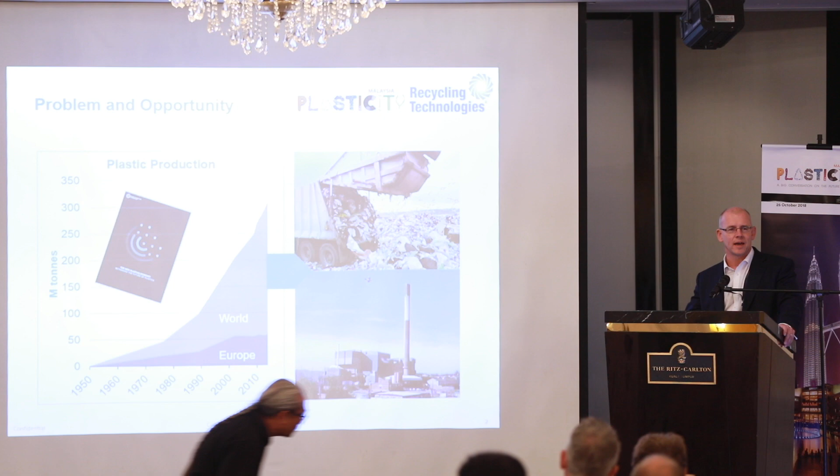So we have to sort out the right-hand side of the slide, which is what do we do with it at the end of its life. 40% going to landfill, 14% going to energy from waste, 32% ending up in the environment. These are the figures from the New Plastics Economy on plastic packaging. We all agree, completely unacceptable.

So what's the answer? If we summarize, the current recycling of plastic, which amounts to, I think it's been used several times today, 10%, is mechanical recycling. So we're washing it, we're flaking it, and we're turning it back into more products. It's going to the consumer, and then back to somebody who's molding it into another product. And that in and of itself is fantastic, and the more we can do of that, the better.

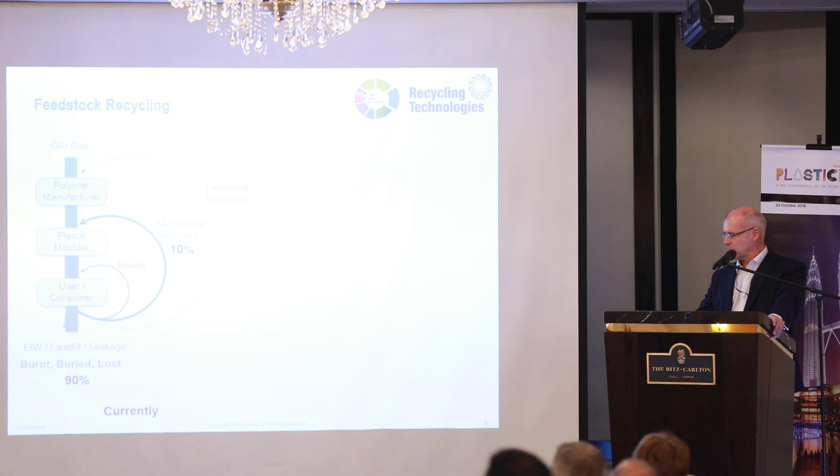But clearly, if that was going to be the solution to the problem, I suspect it'd be a lot more than 10% by this stage by now. And so we need more tools in the toolbox. We've all been hearing it's a complex problem, it's a big problem, and we need as many tools in the tool set as we can to actually fix the problem overall.

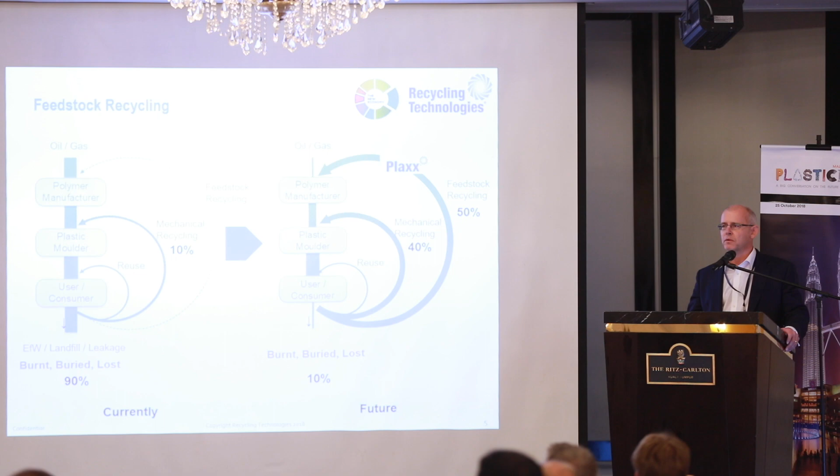One of the things I'd like us to think about is this thing called feedstock recycling. First of all, I'd say it's been great to hear about people like Ravish talking about the magnetic labels, and there's lots of new technologies coming on in mechanical recycling. So in our view of the future, at least 40% of plastic should be able to be recycled mechanically in years to come.

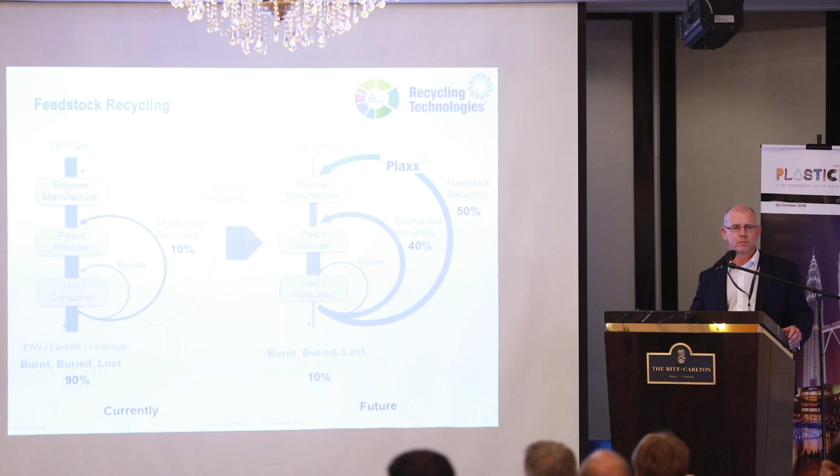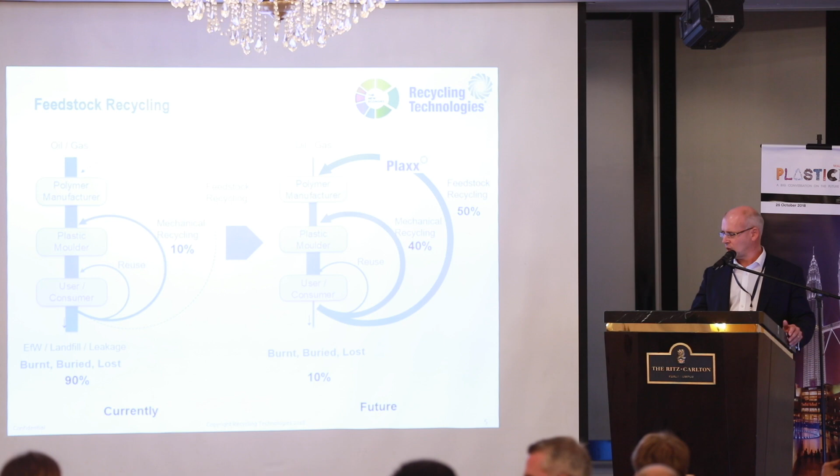Now, I've deliberately not put a time unit on the bottom, but at some point in the future. But I also see a big need for what we call chemical recycling, or more accurately, feedstock recycling—taking plastics which can't be mechanically recycled and turning them back into an oil that can be used by petrochemical companies as the starting point for making more plastics. And that's exactly what we do.

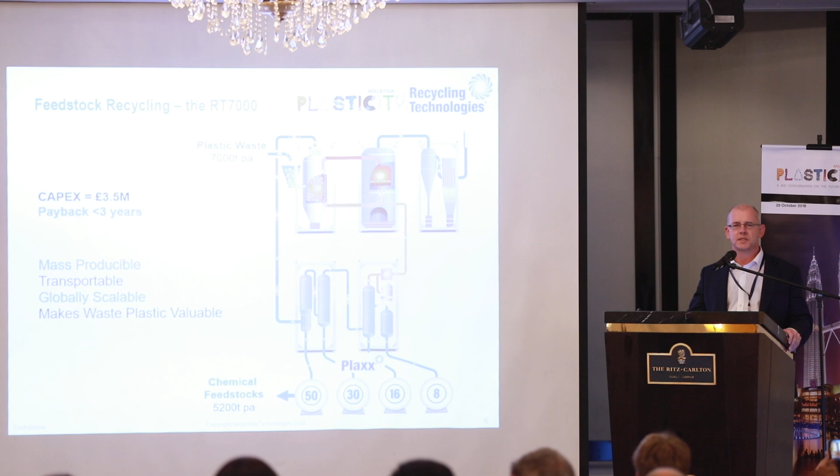Theoretically, you could build one big facility and take all of the plastic that you can't currently recycle in the world to that facility, and the petrochemical facility could actually turn that material back into a feedstock and use it.

The reason they don't is simply because moving very large tonnages of plastic large distances is far, far too difficult. And so our innovation was to actually shrink the idea of a refinery down into a transportable set of modules which we can mass produce.

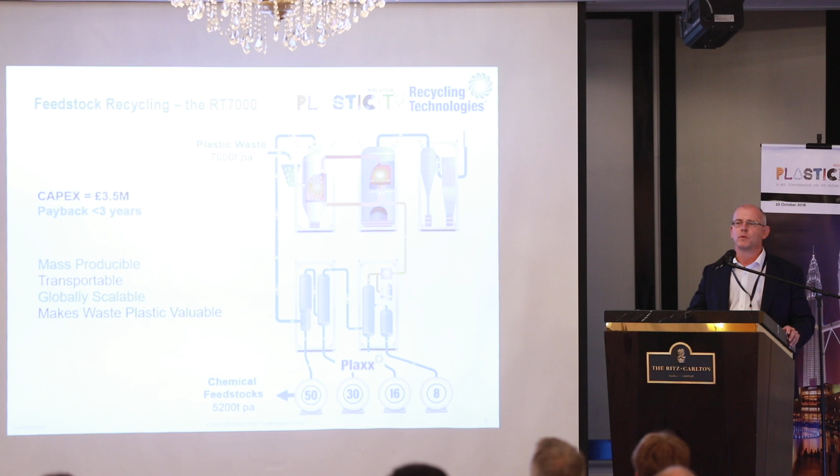So you get economies of scale not by making it vast, but by making it mass producible, and then having something you can actually transport to every waste center around the world to take the plastic which isn't currently recyclable and turn it back into oil.

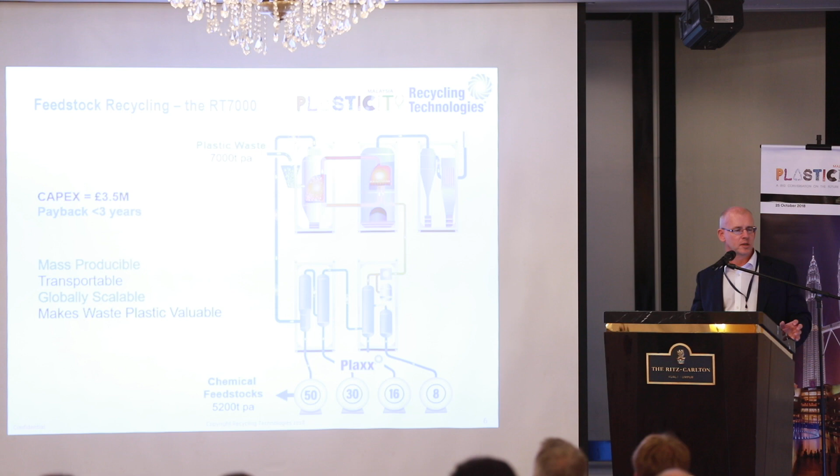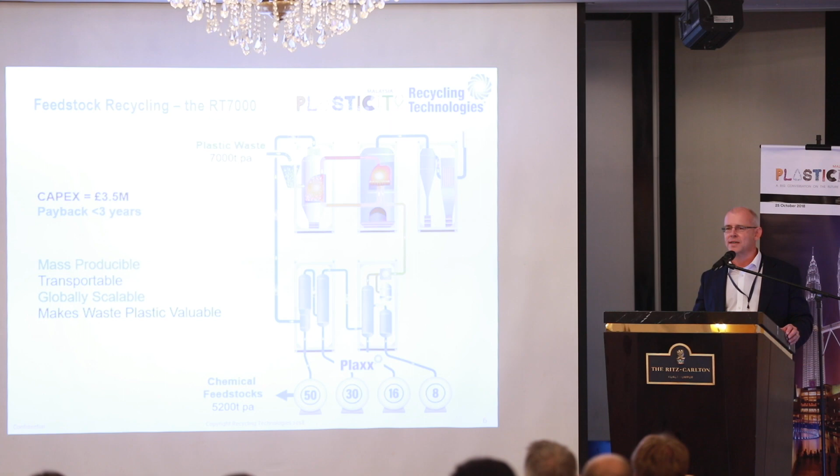I'm talking about crisp packets, multi-layer films, multi-layer films with aluminium, black plastics, food contaminated material, the AD material—the stuff that comes from AD plants after you've taken the food out of it. The films and all that kind of stuff—that's the sort of plastic we're talking about here. That's all perfectly recyclable today from a technological point of view.

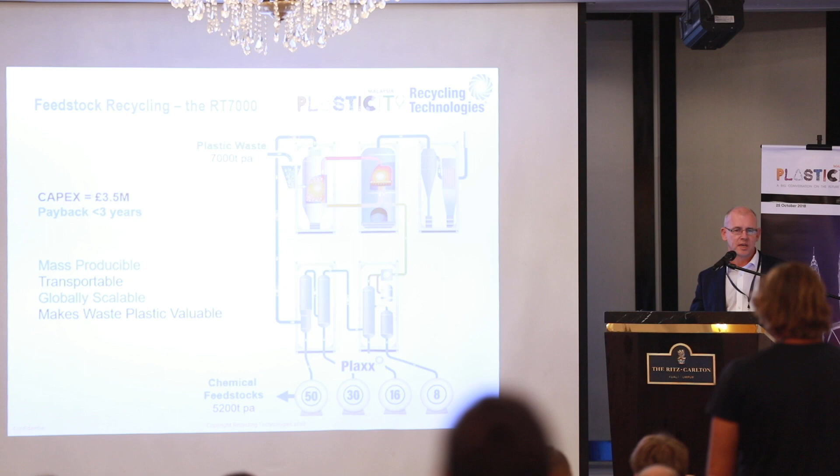The question is how much capacity is there to do it. Our plant would actually take a ton an hour, and therefore about 7,000 tons a year, and turn it into about 5,000 tons of this oil product, or this feedstock.

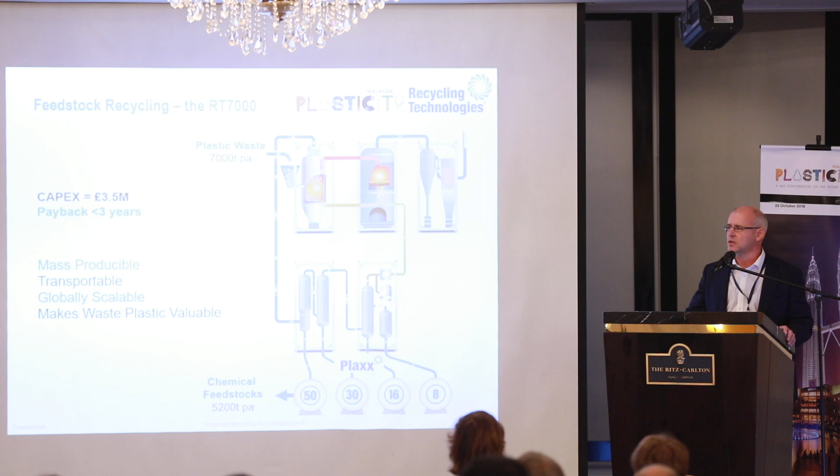Whilst we want to do something great for the environment, it has to make very good financial sense. This machine would have a typical payback of less than 3 years when oil is at $50 a barrel. Currently oil is at a lot more than that, so you can do the maths on the payback.

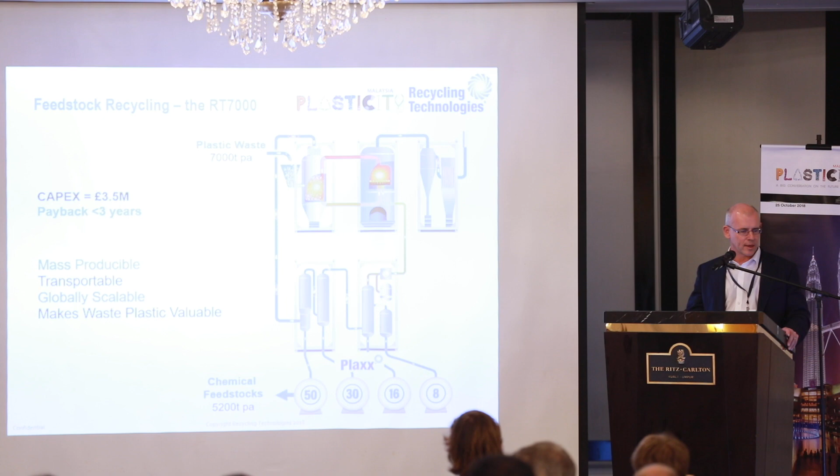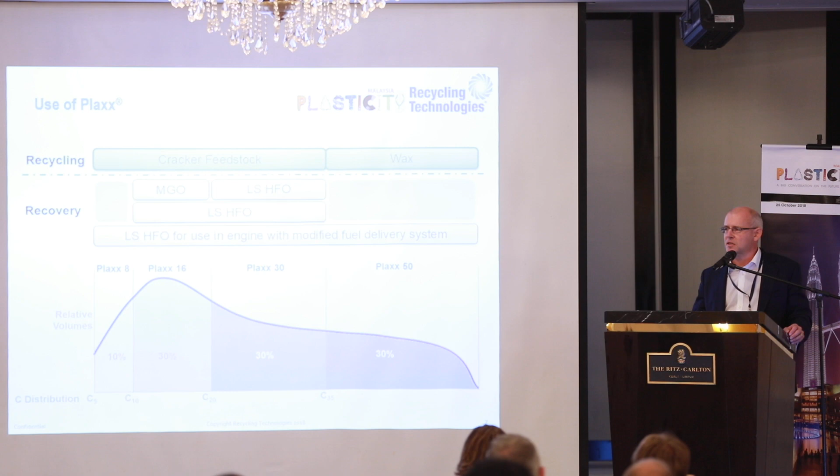Steam crackers start with either gas or with liquids. We're talking about the liquids here, and any steam cracker around the world which is making polymers can actually run on this kind of material.

So where are we? Because it sounds like too good to be true kind of analysis. A lot of people say, well, a lot of people have tried this, there've been all sorts of problems. And you're absolutely right. You can go back to Warwick University, which is where we actually spun out of, and there were tests going on with dubious kind of results.

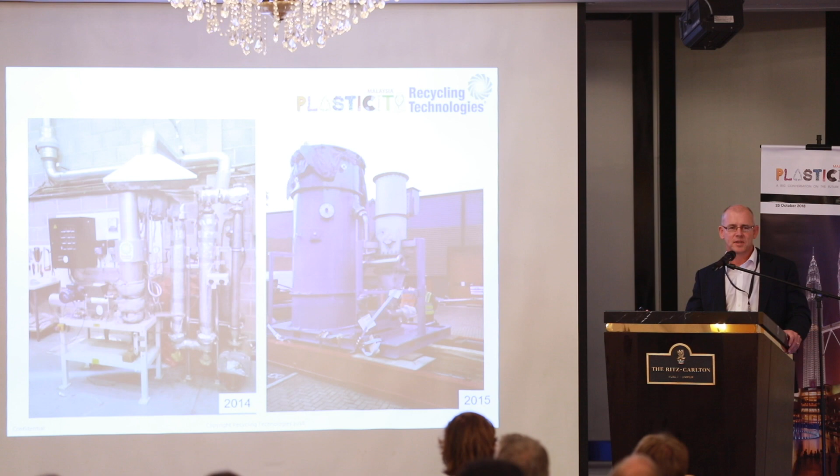In 2013, we formed a company. In 2014, you can see we were at laboratory sort of scales. And then we started scaling up.

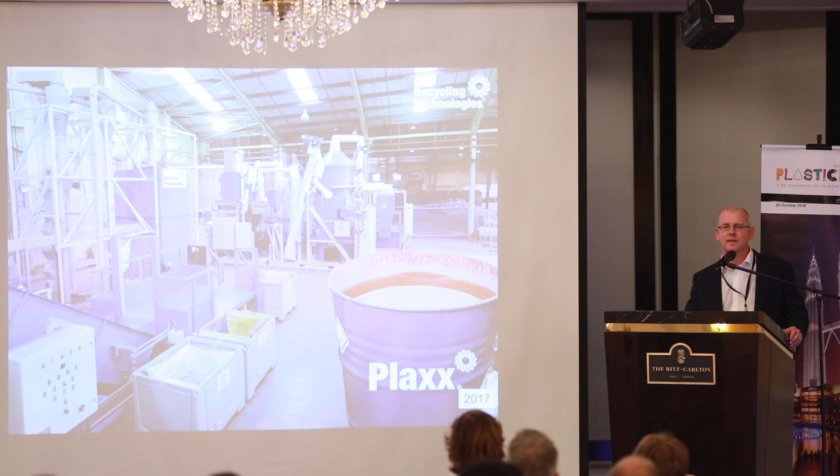This is the plant when it was assembled at our manufacturing facility. Then we took it out into a waste environment and started making barrels of this stuff that we call Plaxx. A lot of people ask me, why is it called Plaxx? It's a slightly waxy hydrocarbon. It used to be plastic. Plastic, wax. There's limits to engineers' innovation.

But that doesn't solve the capacity problem, because this plant is actually doing a few thousand tons a year. This is our pre-production facility. So the first of our production facilities is due to come on stream next year.

That's supporting our aim of producing 7 million tons of Plaxx in the year 2027. If you remember the math, 7,000 tons into 5,200 tons of oil, and you work backwards, that's about 10 million tons of plastic recycling capacity that could be built for 2027.